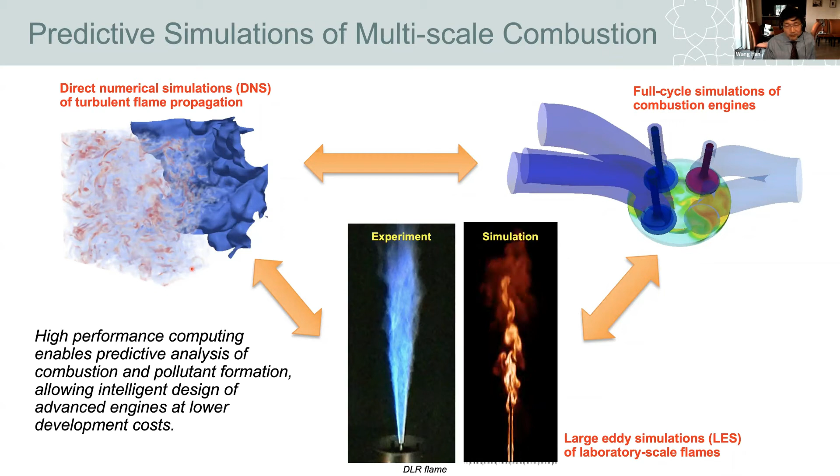So it's a little too much to cover. Today I'm going to pick only one of the three topics, which is DNS. And specifically, among DNS, we will talk about the classical flame-in-a-box kind of configuration. All right, what's the framework? I guess this is becoming kind of cliche in today's combustion talks, so I'm not going to spend too much time on it.

The Saudi government is moving forward into this so-called circular carbon economy. We want to achieve a sustainable ecosystem where we don't produce any carbon, so that we can use either current hydrocarbons or even future e-fuels altogether. There are 4 R activities under CCE: recycle, reuse, remove, and reduce. And you can see there are a lot of things our combustion community can contribute.

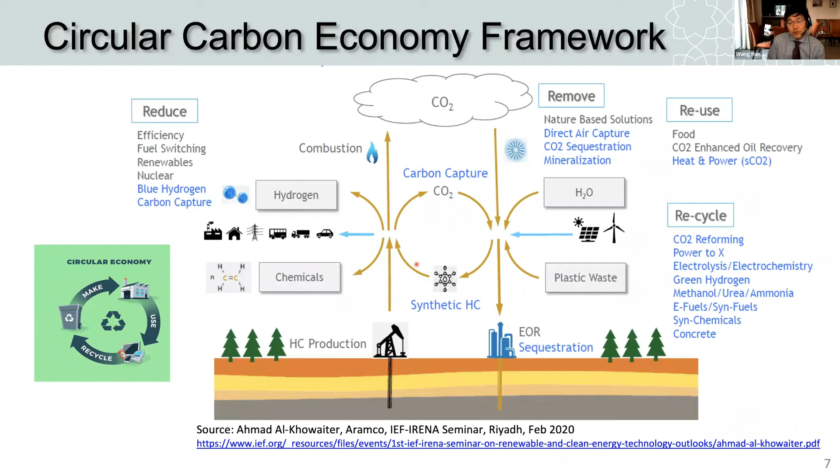So again, to the general audience, I guess we all agree that combustion still has a vital role toward the sustainable future, especially in the context of solar fuels. If you assume that solar energy is going to be the main source of energy in the future, so-called power to X is the ultimate viable solution.

And the X can be electricity stored directly in batteries, but we believe there's a lot of existing infrastructure, and also storage and transportation. The synthesis of these gaseous and liquid fuels will really play a significant role in making everything work in an integrated way.

So with that, everyone knows we are going full blown into hydrogen, which is one of the basic e-fuels. And as a next step, since hydrogen is difficult to carry around, ammonia is another one that is gaining a lot of research interest. So that is the basic framework of what we're going to talk about.

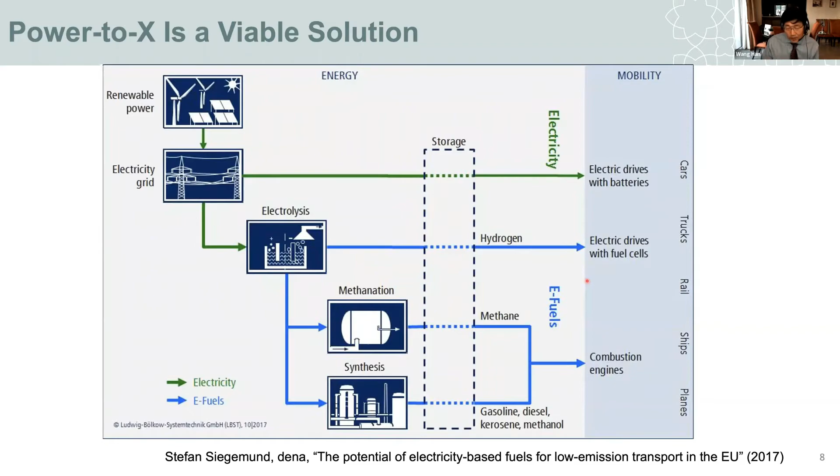And like I said before, at CCRC we've been firmly based on fundamental chemical reactions and flame studies, but we are slowly branching out into e-fuels and, on top of that, carbon capture. Concentrated solar power is another area we're expanding into with Bassam Dally. We also have growing hybridization in transportation as well as fuel cell activities. So we are diversifying into a more comprehensive energy research institution.

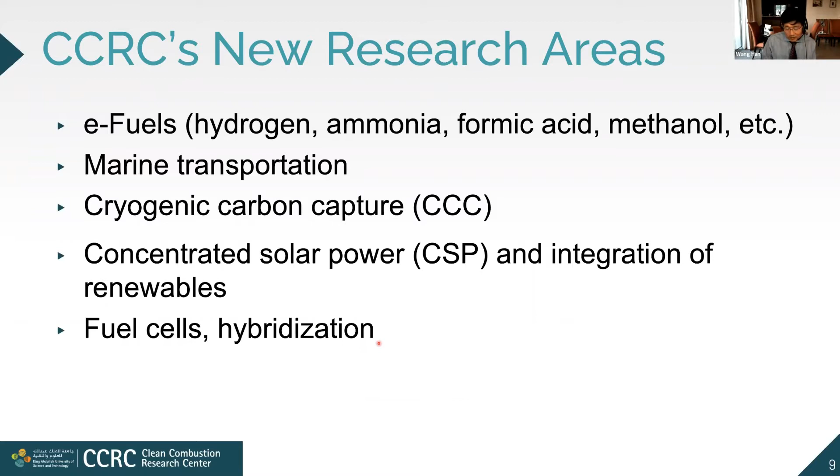So I talked about hydrogen and ammonia as major e-fuels for the future. I think it is very important to develop combustion technology for them, how we can burn them cleanly and efficiently. The chemistry of hydrogen is fairly well understood. Ammonia, not as much, but both are fairly simple fuels. Their chemical pathways are relatively simpler compared to other engine fuels, but burning them cleanly and efficiently requires a lot of fundamental knowledge. So there's plenty of work to be done.

I would name three key questions about making it work. In the case of ammonia, it's just really difficult to burn, so how can you make it burn faster? In the case of hydrogen, it's burning a little too fast, and there's the problem of flashback, another fundamental issue to deal with. And in both scenarios, if you burn at high temperature, NOx formation is going to be a continuing issue. So those are the three issues, especially for ammonia, that we need to resolve.

Just as a disclaimer, I'm not going to talk about any of these today in my presentation. This is still a work in progress, along with many other community members, but I am trying to contribute to this knowledge development by utilizing DNS as a research tool.

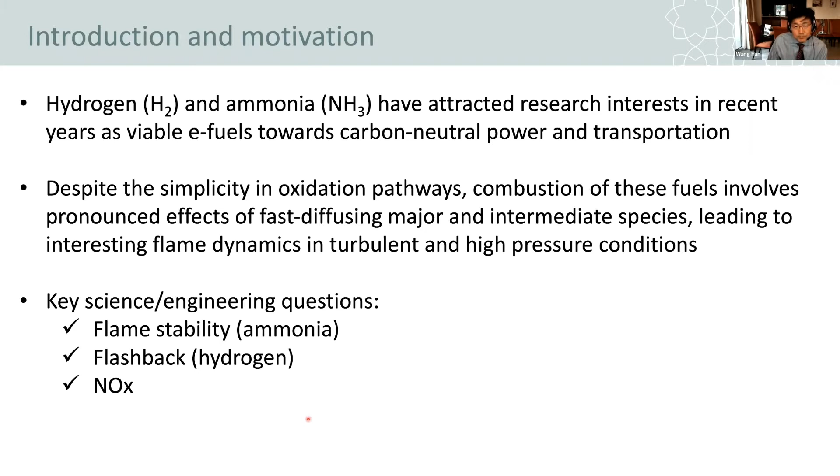So DNS, well, everyone knows what it is. I guess we have to be careful about the terminology. The word direct actually came from the turbulence community, non-reacting flow, in the sense that we are using the full Navier-Stokes equations without closure models.

Well, in the case of reacting flows, the Arrhenius reaction rate expression itself is a model, unless we go into the molecular kinetic scale. So in a way, DNS is a misnomer, but that is the context. What we mean is that we are solving all the continuum scales without any turbulence closure model, although for reactions we accept that it is still a kind of curve-fit model based on the Arrhenius form.

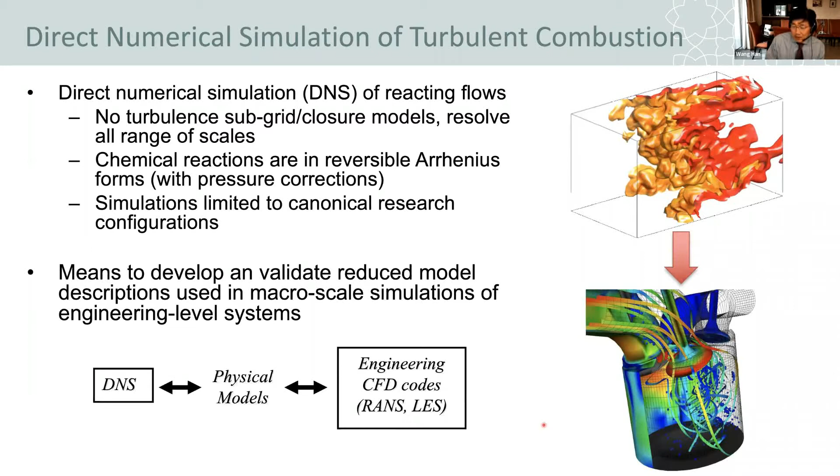And the role of this DNS is that by resolving everything in the most accurate temporal and spatial resolution, we can understand the science, physics about turbulence flame interaction, and that knowledge can be used in developing advanced submodels for high fidelity engineering simulations. So that's the context.

So what I'm going to talk about for the next maybe 35 minutes is three parts. I've done this flame in the box for hydrogen flames for some time. Actually, 10 years ago, I was starting with a hydrogen flame and hoping, once I get enough about hydrogen done, to move into hydrocarbon flame, which is a real thing. While I was getting ready for doing that, now nobody's interested in hydrocarbon anymore. Everybody's working on hydrogen. So I just stayed on the same path, except I'm going to add on ammonia flames.

I must also say that ammonia flame simulation has been recently started, so this is going to be only a brief report of the work in progress. Followed by that, I will briefly show you how these DNS data can be used in model validation, and I'll only give you one example. I work with many other colleagues on providing this data for model validation, but this will be just one example, a collaboration with the University of Toronto group, Swetaprovo Chaudhuri.

And I will try to leave enough time for the last item, because this is a fashionable item, I guess. Everyone wants to use AI machine learning. And my current focus in utilizing machine learning techniques is how I can use them to accelerate this DNS simulation, which is very time consuming. So I will give you a couple of examples of my recent effort. So that's the outline. So let's get started.

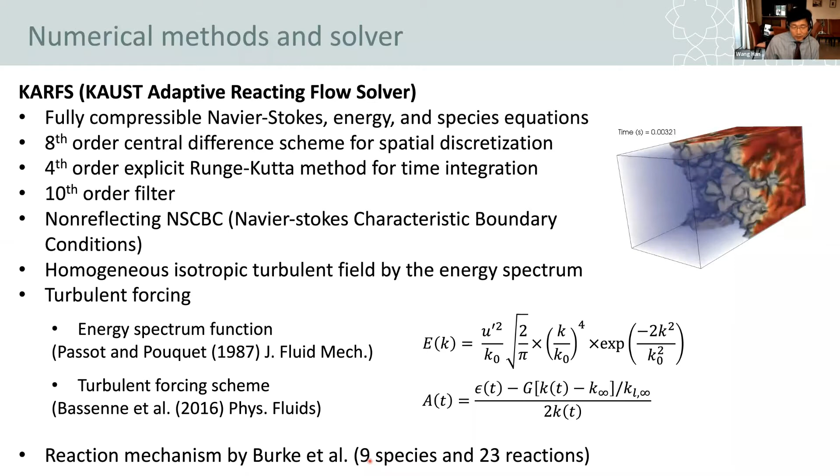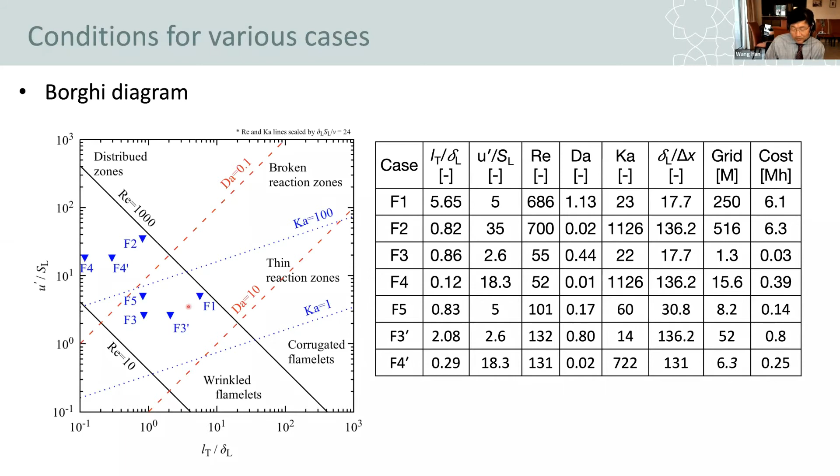So these are 1, 2, 3, 4. Let me remind you, 1, 2, 3, 4 corresponds to the parallelogram. So 2 and 3 are vertically on the same axis. F1 and 2 share the same Reynolds number. 3 and 4 share the same Reynolds number. 1 and 3, and 2 and 4 have the same Karlovitz number. So what would you pick as a similarity between the two?

Well, I guess the case F1 is further out in this L over delta ratio, meaning that you have a much larger integral eddy scale that has enough power to disrupt this flame front. So you can clearly visually see the flame structure is a lot more wrinkled compared to the others.

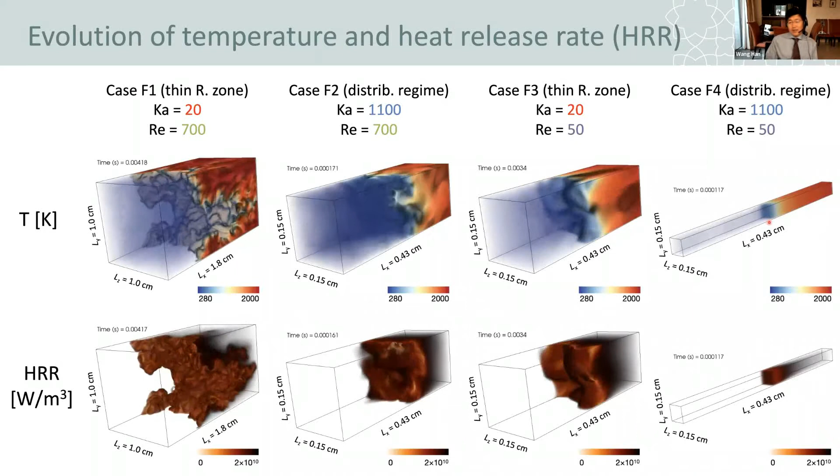And 2 and 3 compared, despite the fact that Karlovitz number is orders of magnitude different, they are visually not that much different. By that I mean small scale features are here for sure, but front to back, the thickness of the turbulent flame brush is not that different. And furthermore, 2 and 4 are at the same Karlovitz number, but as I bring it down into the small Reynolds number, well, you hardly see a whole lot of wrinkles at all. So that is a kind of visual observation.

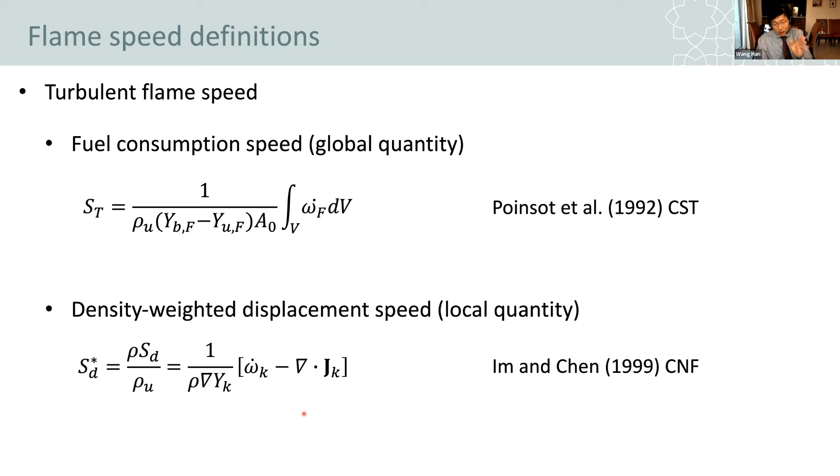So how does that affect the overall turbulent burning velocity? Of course, this turbulent burning velocity correlation, effects of turbulence on overall flame brush speed, has also been beaten to death for many decades. Still, we are not clearly sure exactly how we should scale them. So we conducted the overall consumption speed analysis, which is a true metric of the flame speed, and then also displacement speed, just to measure the local front propagation speed in a density weighted manner.

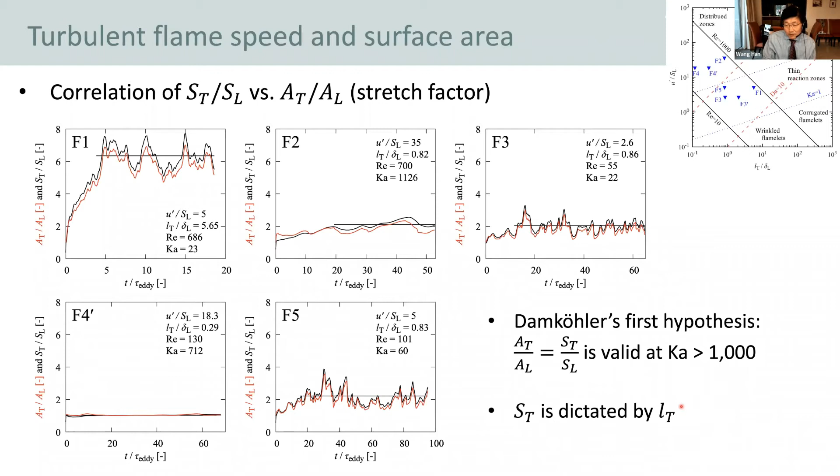And this is mainly the scaling with the LT over delta L. It's not the first time we report this. It is literally the Reynolds number effect that many people in the past hypothesized as Reynolds number scaling. So that's the first message I would like to convey today to the audience.

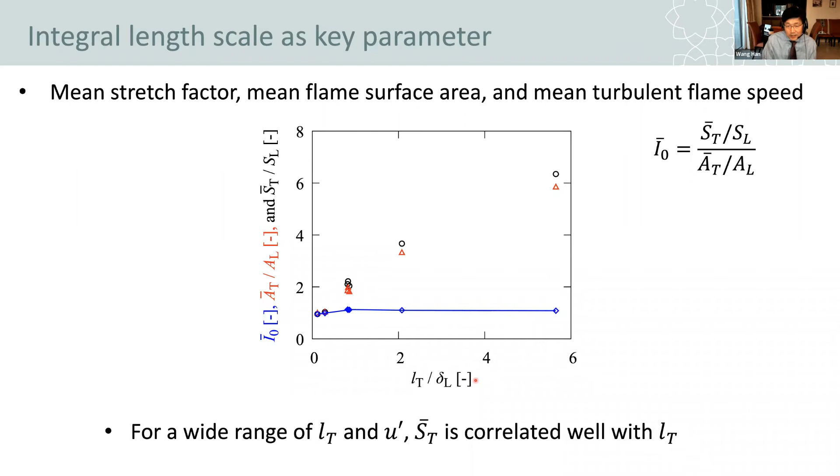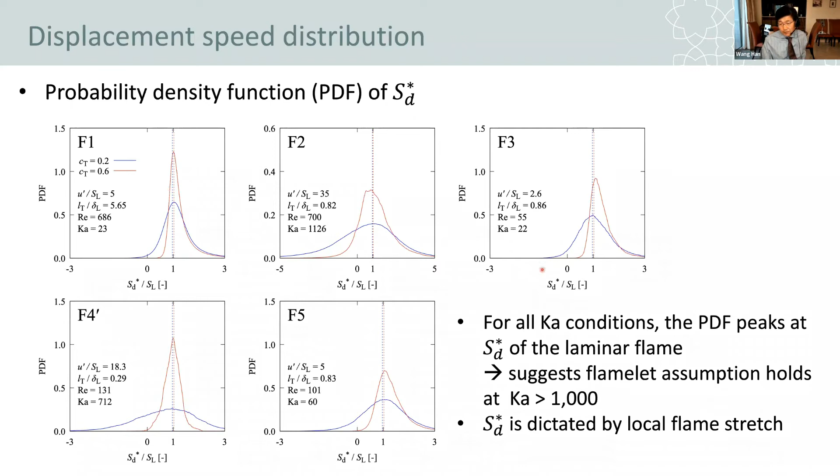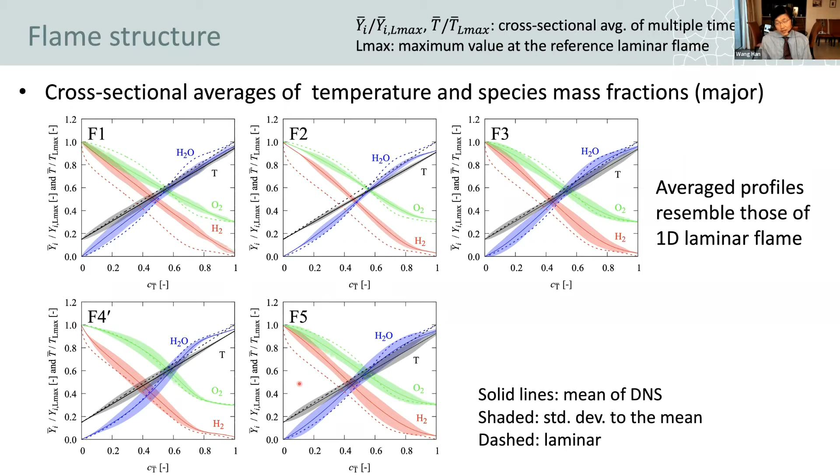Even when the Karlovitz number is 1100. So all these are in the broken zone, and the distributed combustion regime may not exist. And I believe that many of the turbulent experiment data also support that conclusion. So I think that's the key message here.

If anything, some deviations are happening with the intermediate species, but again, the level of the discrepancies between laminar and turbulent cases is largest in the order of LT over delta, as I mentioned earlier. So F1 shows the largest deviation, and as you go to the left of this map, F2 and 3 show the next largest deviation. F4 prime and 5 show smaller.

In all cases, it's remarkable to find the largest deviation from the laminar flame happens far upstream, which is attributed to the fact that I have more intense turbulent eddies further upstream of the flame zone. And that has further impact in the high pressure combustion mode, as I will show in a moment.

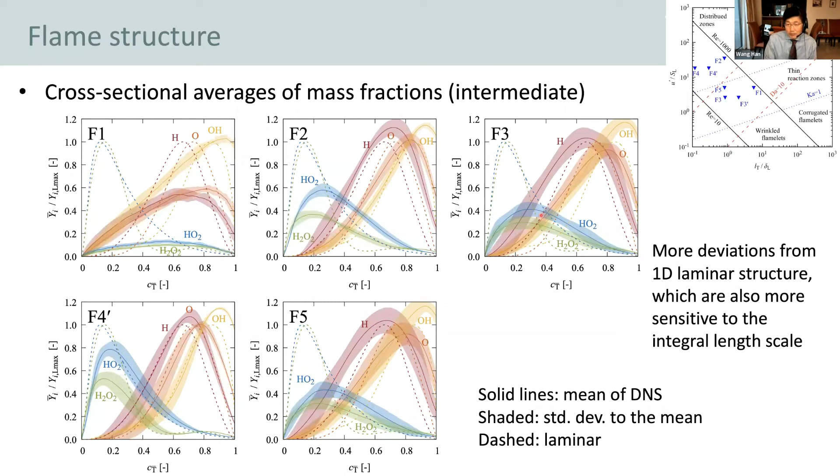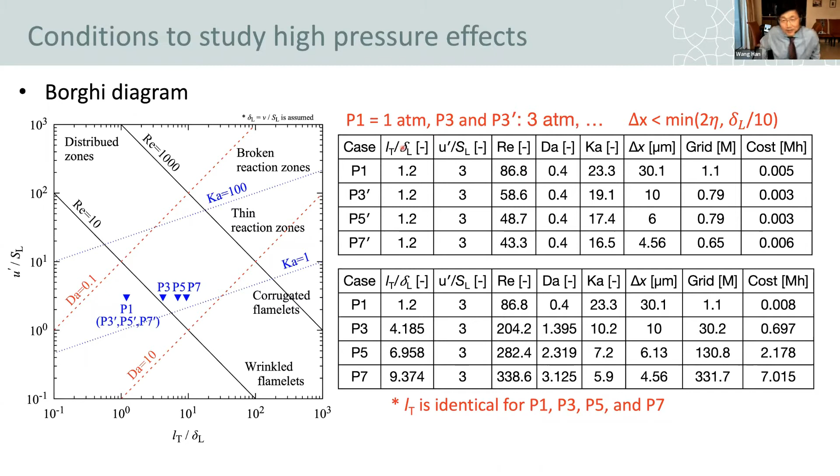But since you pressurize it, the flame thickness gets smaller. So if you maintain the same physical integral eddy size, then the LT over delta L increases. That's why you naturally move to the right. Alternatively, we have also run cases staying at the same point by reducing LT along with the flame thickness so that we maintain the ratio, to highlight the difference between the two scenarios.

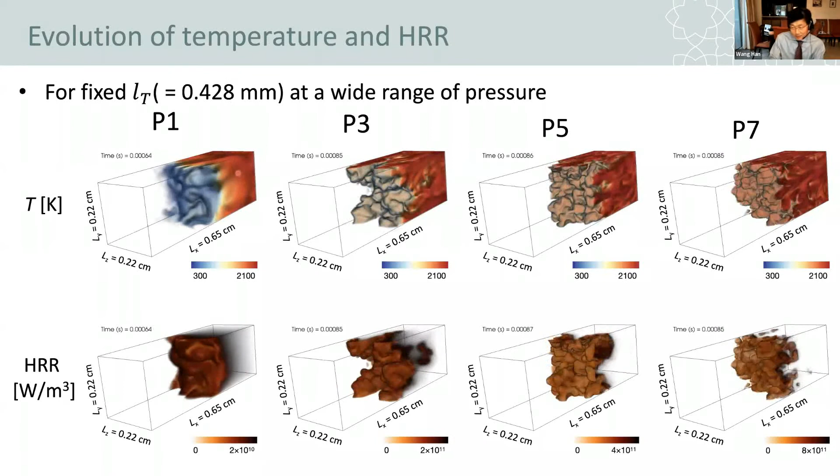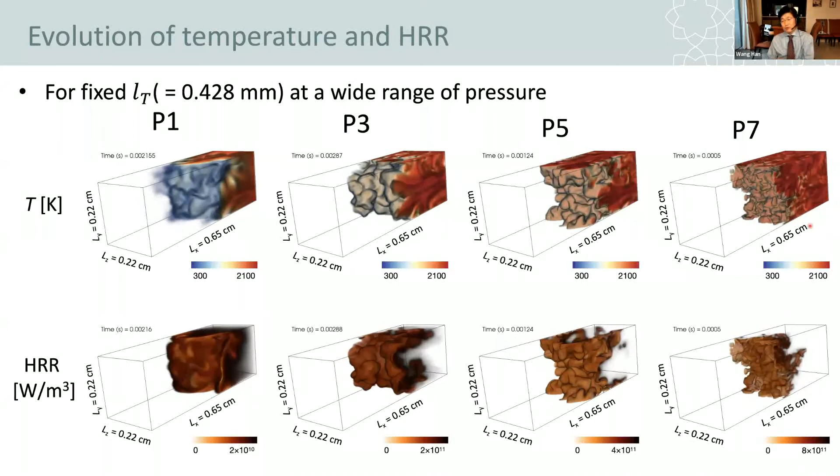So once again, the point that LT over delta is a dominant factor in terms of burning rate enhancement is further supported even at high pressure conditions. That's maybe not a breakthrough, but some meaningful finding.

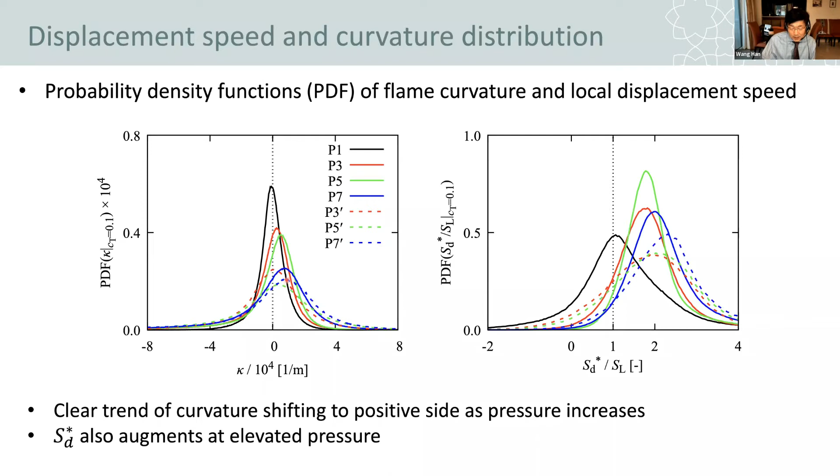Speaking of the spiky behavior on P7 prime, we attribute that to the shift of the curvature statistics. And this is the curvature statistics, and the mean value of the curvature is tilting toward the positive side, especially when you are dealing with P7 prime, which was shown here. So the spiky behavior in this sudden burst is attributed to this pointy leading point of the turbulent flames. So there are some people arguing this leading point concept is dictating this flame propagation behavior, which is still controversial.

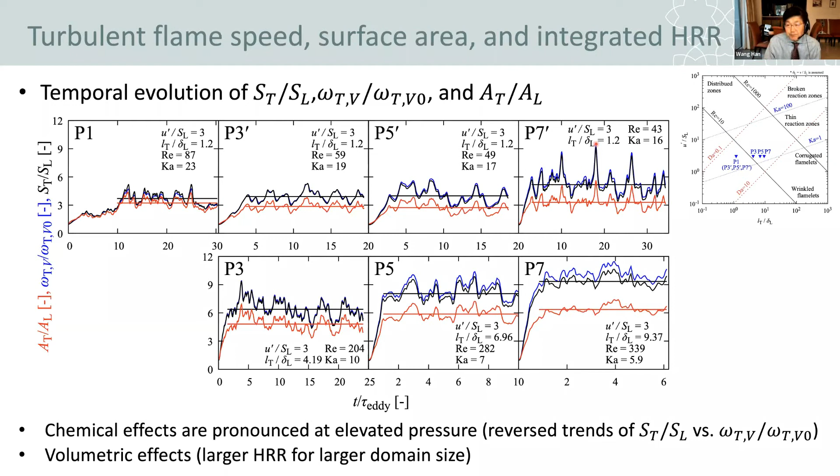Okay, speaking of the burning rate enhancement, once again, as we move to the right, the enhancement is bigger. That's the black curve. Red is area ratio. Again, they are correlated, although there's a little bit bigger gap as you increase the pressure. And this dotted line is staying on the same LT over del. So they remain all the same except for the little push, as I told you earlier. So this remaining discrepancy and the additional push is attributed to the combination of reaction and diffusion.

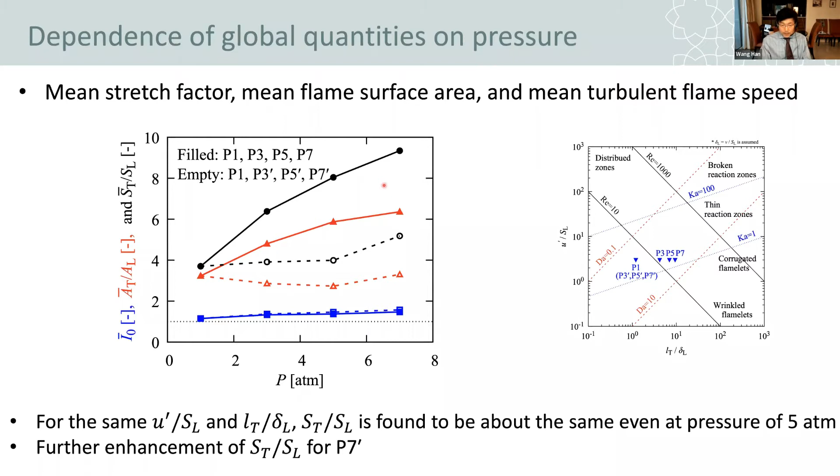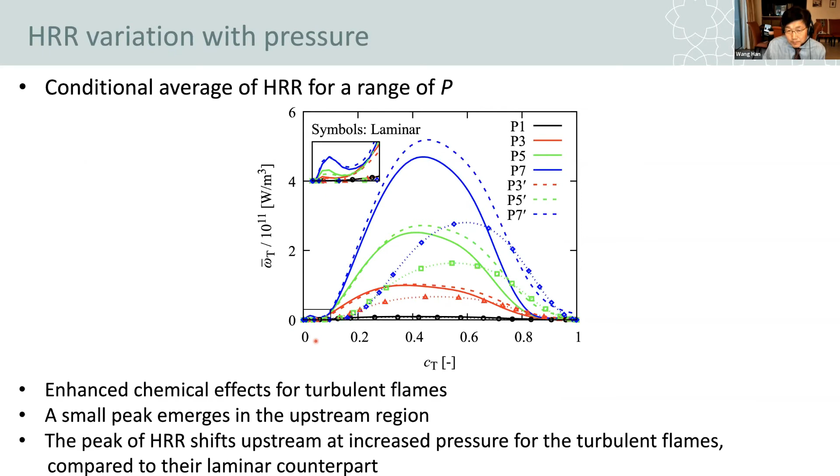Well, I guess if you know well enough about basic hydrogen chemistry, you know what is the main contributor to heat release, which is the H plus O2 recombination reaction. And without surprise, that is actually the main cause of that. And as we know, even in the regular atmospheric hydrogen flame, this one contributes a lot, and this one peaks way up in front. And this is what makes a hydrogen flame rather unique compared to many other hydrocarbons, where heat release is occurring way ahead in the preheat zone. And this is even more so, as we find out, as you increase pressure to 7 atm.

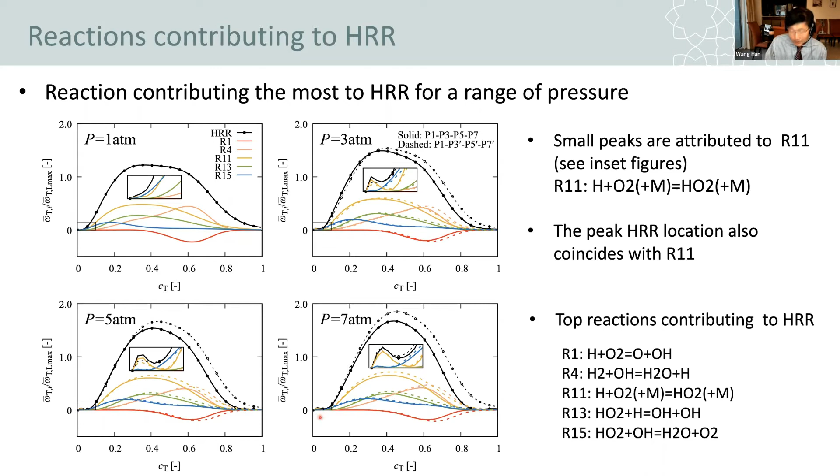And how is it happening? This is augmented, as we found out, by the transport of hydrogen way out into the upstream zone. So diffusivity is reduced, as you may know, at higher pressure, but at the same time, gradients get steeper. So the net effect is that in these high pressure conditions, you will have more effective diffusive transport of H2 farther upstream. So as a result, you will see a much larger level of heat release rate, even more than linear scaling. And that's what we found. And this is an additional effect attributed to the enhanced burning rate.

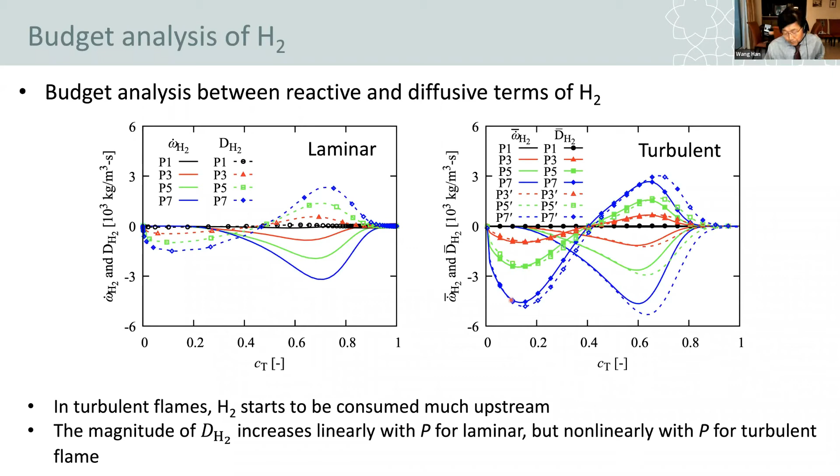Okay, I think I'm doing fairly well in time management.

So those are the gist. There are many other gory details of analysis and interpretation, but these are the key messages I would like to convey today. And this DNS data is quite expensive. Each run takes up a few million hours easily, sometimes even up to 10 million CPU hours. So they are precious, and I've been working closely with many other colleagues to provide this data for validating some theoretical models. So some of the recent work that I collaborated on with Swetaprovo Chaudhuri at the University of Toronto is about the upstream flame interaction model.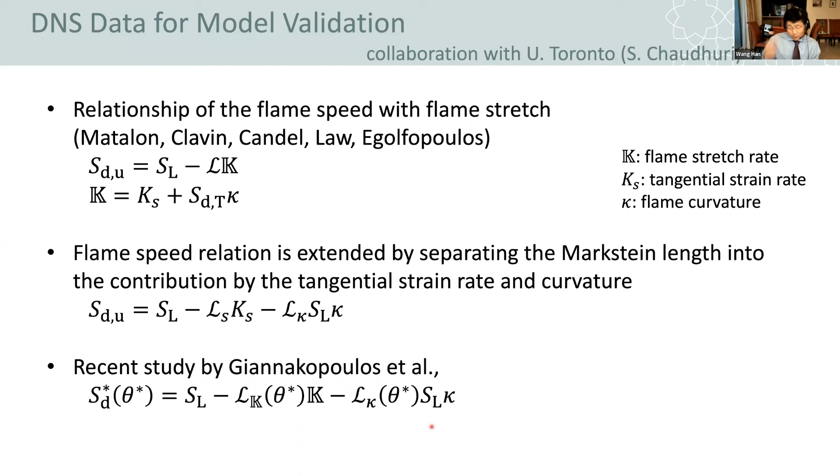So as we have more and more corrugated turbulence, well, step back a little bit for a moment. I guess most people in this audience are familiar with the stretch model dating from the 80s about the linear relation of Markstein and Karlovitz numbers. And that has been further extended because this linear relation doesn't hold too well if the curvature becomes very large. So there has been an attempt to separate out the stretch Markstein number and the curvature Markstein number. And that is more in the 90s and 2000s, and that seems to match the data better. Now, if you go even further into larger levels of curvature, what happens? Well, then you need to start worrying about flame-flame interaction and annihilation. And this is what the Chaudhuri group has been doing.

And Dave and Chaudhuri, and this is not me, some years ago developed this very nice, elegant theoretical model based on scaling analysis, of how we can modify the displacement speed of the flame front as a function of curvature with an extra correlation coefficient. That effective coefficient represents the flame interaction behavior. And that model was validated against DNS, but their data was at fairly low Karlovitz number.

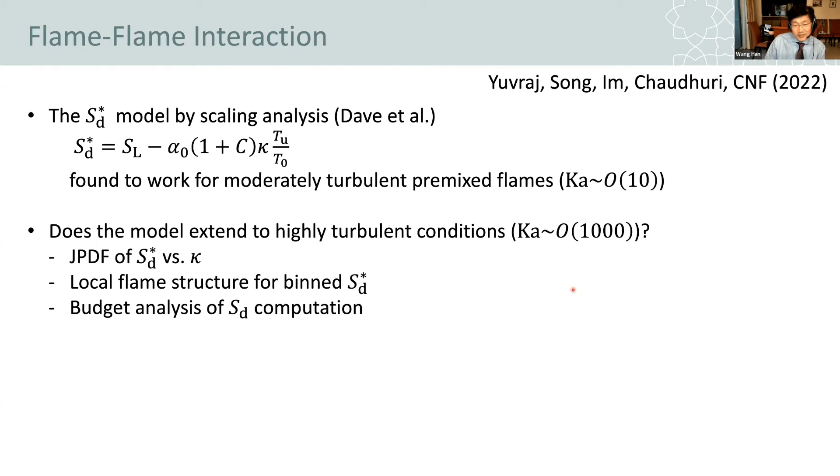So does it extend to high Karlovitz number conditions? That was our question to answer. And like I said earlier, Karlovitz number is over a thousand. Our conclusion was, yes, it does work. So here is just a brief synopsis of the result.

We try to correlate these 4 different cases, 1, 2, 3, 4, which correspond to the same cases at atmospheric conditions. Some of the Karlovitz number range goes above 1,000. It's forced turbulence, but nevertheless, their theoretical model, shown as a dashed curve, fits very well. So let me step back.

We did the analysis for different isosurfaces, 385, 641, at 4 different levels, from way up in the upstream preheat zone all the way down to the downstream region. As you can see, when capturing the displacement speed of the downstream region, the original model, the solid line without flame interaction, tends to work better, because the dash-dot blue line is the actual curve fit based on DNS data, and the black solid line aligns better with that.

On the other hand, as you move upstream, the new model accounting for flame interaction aligns better. So what's the message? I guess the implication is fairly clear. Here's a picture sketch of that.

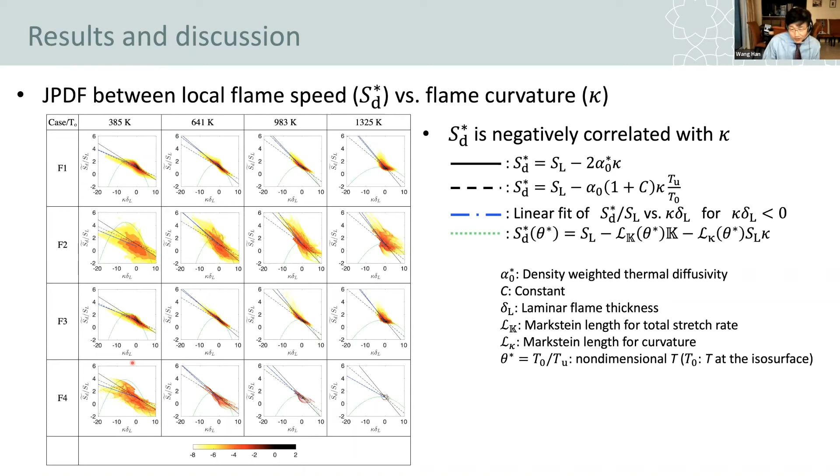And it is remarkable to see that, although the agreement is a little bit off, especially at high Karlovitz number conditions, the deviation level is still reasonable, and they seem to predict the behavior fairly consistently. So that was one quick example of how we apply this to model validation.

Okay. Ammonia flame, I don't have much time right now, and this is work in progress. So what are the distinct points of ammonia-air premixed flame? I think I can nearly skip this; everyone knows the issues of ammonia in practical application. I would like to understand the fundamental characteristics of turbulence-flame interaction in ammonia flame.

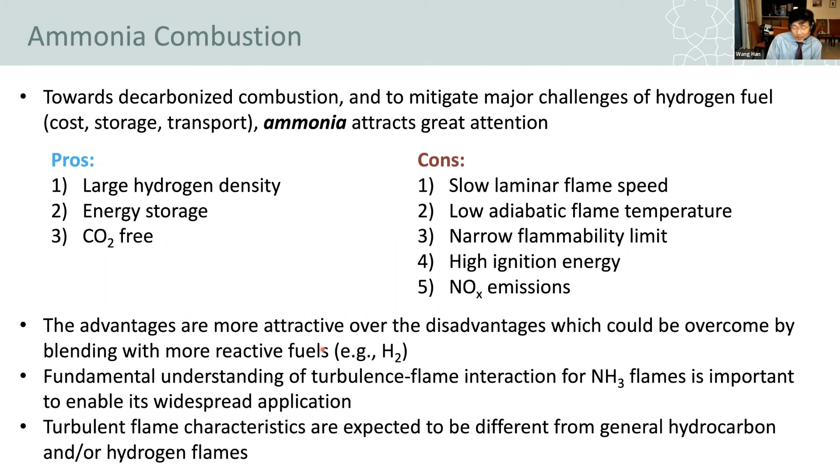For one thing, in neat ammonia flame, the heat release rate profile is shifted further toward the downstream side of the flame. We are still investigating it, but my expectation is that in the context of homogeneous turbulence decaying across a flame thickness, the characteristics will be quite different.

So we tried low and high LT over delta L, similar to the hydrogen counterpart, and ran 5 cases. And there's one more A1 prime case: we picked the 1.2 equivalence ratio, found to be the peak flame speed. Then I picked a slightly lean condition, but to compensate for the lower flame speed and match the laminar flame speed, we had to preheat the upstream a little more.

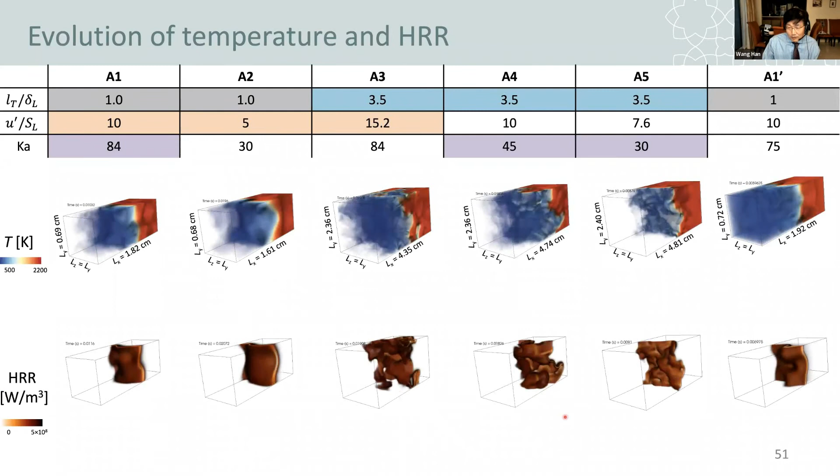And so we compare the burning rate behavior. Once again, 3, 4, 5 are higher LT over delta. That behavior doesn't change: we see a lot more flame wrinkles, and therefore flame speed enhancement. A1 prime is supposed to be compared against A1. Those have comparable U prime over SL, LT over delta, and similar turbulence intensity. We want to see how they fare in terms of burning rate enhancement.

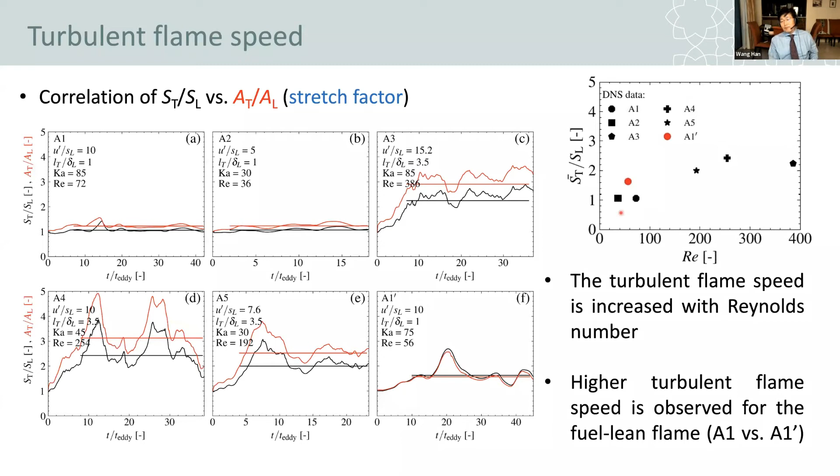And there's a kind of, the burning rate enhancement goes up and down. That's one. And comparing A1 and A1 prime, those are comparable conditions, but A1 prime, the lean condition, at comparable Karlovitz and Reynolds and everything, U prime over SL, delta, LT over delta, all the same, shows a little bit more enhancement. And that behavior, it turned out, is found to be the effect of Lewis number.

So again, Lewis number has been investigated extensively. Here it is again playing a role even in ammonia flame. So in the lean ammonia flame, as you can imagine, the effective Lewis number is less, and that difference of effective Lewis number makes up for that much of the stretch factor difference. So that is a tentative finding, although ammonia flame produces a lot of hydrogen as an intermediate species, and how that plays a role in the context of this Lewis number effect is still quite complicated, and that needs further work.

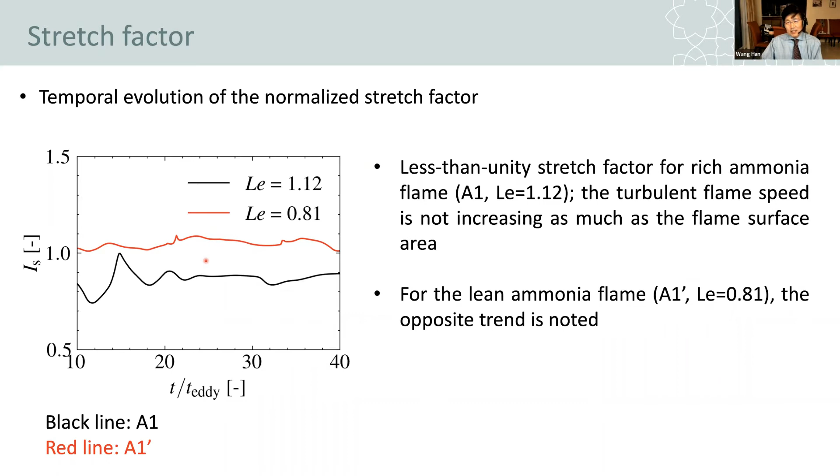Okay, let me spend, hopefully, how are we doing in time? We have 10 more minutes, is that okay? Maybe 7 minutes, all right?

I'll finish up with the different context of computational aspects. Now, all these DNS simulations, if you want to ramp up the scale of simulation, become very expensive. So there's a constant need, no matter how the computational hardware becomes faster and faster, still we want to do more and more. We want to run faster and faster to achieve a big simulation possible.

So I had the pleasure of working with two brilliant colleagues, Professor Mauro Valorani at the University of Rome and Venkat Raman at the University of Michigan, on two different aspects of how we can further accelerate these DNS simulations. I'm going to just quickly give you a glimpse of the gist of the concept. The first is acceleration by theory, by utilizing different time scales, using computational singular perturbation.

So I have worked with Mauro Valorani for more than 10 years on this CSP analysis. CSP is essentially a fairly simple automated eigenvalue decomposition. If I have any reacting system of n scalar species, for example, and you transform them into the eigenspace, you can find n eigenvalues representing distinct time scales of these characteristic chemical modes. And you can rank them in order from fast to slow. And oftentimes there's one big gap in between.

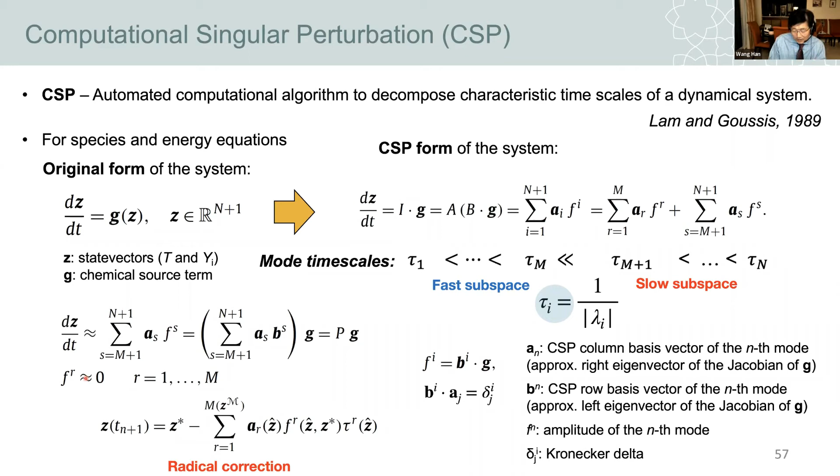So the algorithm is the following. Starting from any current time, you first do the radical correction just to make sure your fast scales are exhausted, and you do the explicit time integration. Here's another important thing: you don't want to necessarily use implicit time integration, which is costly. Now that all the fast time scales are eliminated, the easiest straightforward way of doing that integration is the explicit scheme. So you go quickly to the next time step. Now you deviate from this manifold and you apply the second radical correction to stay on track. This general algorithm works out very well.

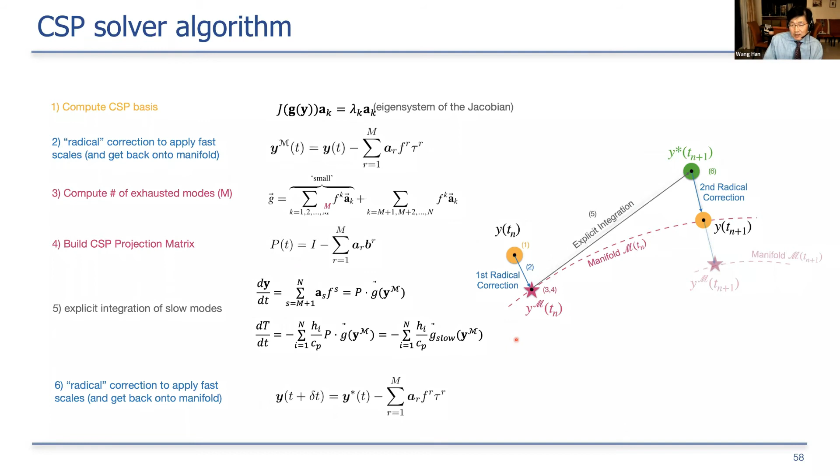This has been around for some time, but one key drawback of this method is that in order to apply CSP and radical correction, we need to compute the CSP basis vectors, which is basically linear algebra eigenvalue determination. That is quite expensive. So our idea is, this is a general approach in the numerical algorithm, as I just described.

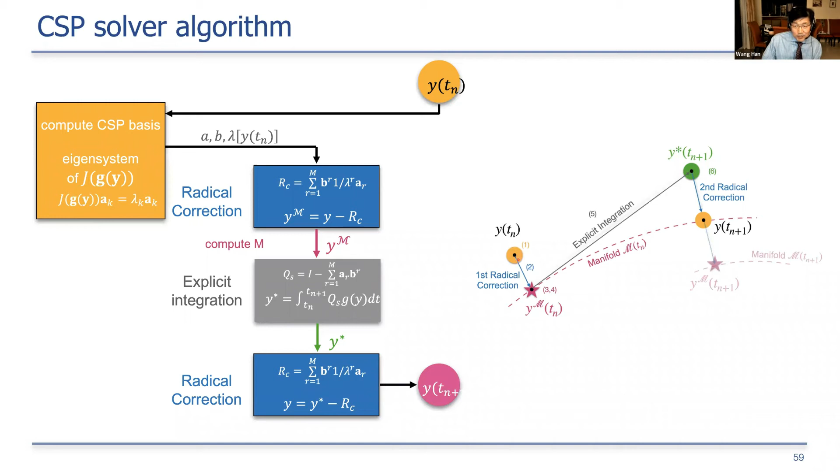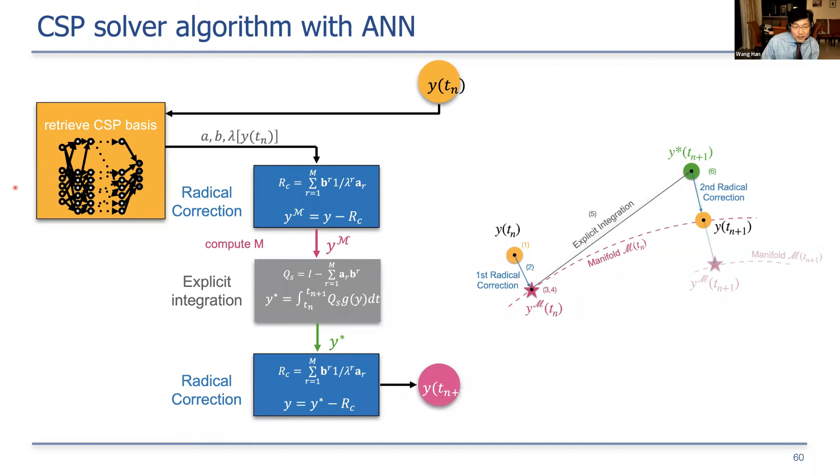So now our idea is to speed things up by replacing this basis vector evaluation using machine learning, using the artificial neural network algorithm to quickly compute this based on that database. So that was the gist of it. And so we reconstruct this projection basis based on the ANN algorithm, which speeds things up significantly.

And one important thing to note, without getting into too much detail: the errors in the basis vector estimation using ANN do not affect the solution accuracy. That is a very important thing. So unlike many other applications of ANN for reaction source term evaluation, where the ANN error directly translates to the solution fidelity, here it does not. It only affects the ANN reconstruction part. So that's another important advantage of this approach.

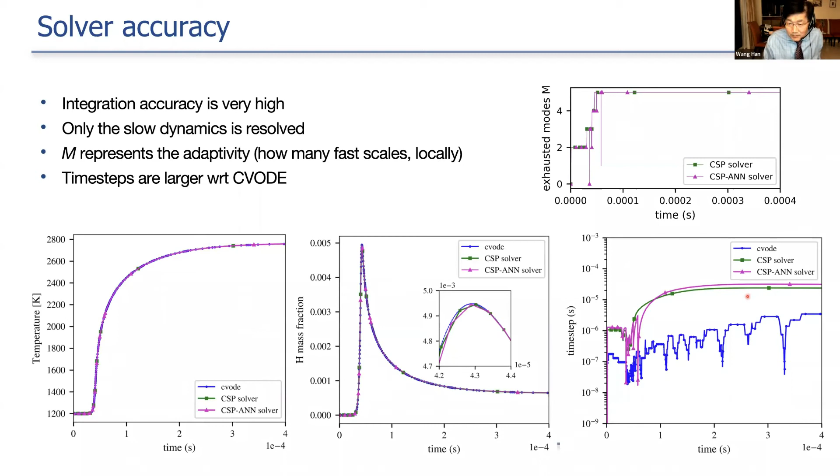So a quick demonstration has been done, which was published recently in JCP. We were able to capture the ignition behavior almost accurately, while the time step following the CSP solver as well as CSP ANN—CSP solver means I don't use ANN in determining the eigenbasis—yields nearly the same delta t, which is orders of magnitude bigger. And the ANN solver will be much faster because the basis vector evaluation is much faster. Okay. So one last thing.

Another aspect of speeding things up is the hardware aspect, CPU, GPU. GPU is quite a significant portion of supercomputers today, so we want to take advantage of it. As many of you already know, what GPU does much better than CPU in reacting flow simulation is reaction source term evaluation, because those are usually local computations with a lot of number crunching in a local space. So it is really well suited for GPU.

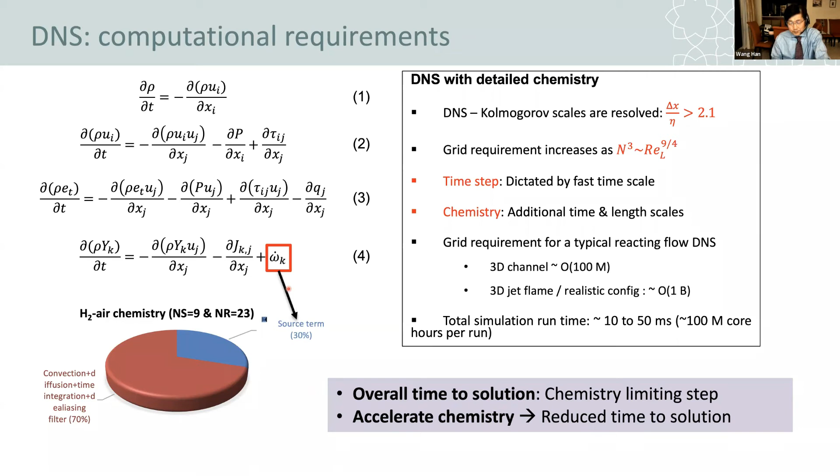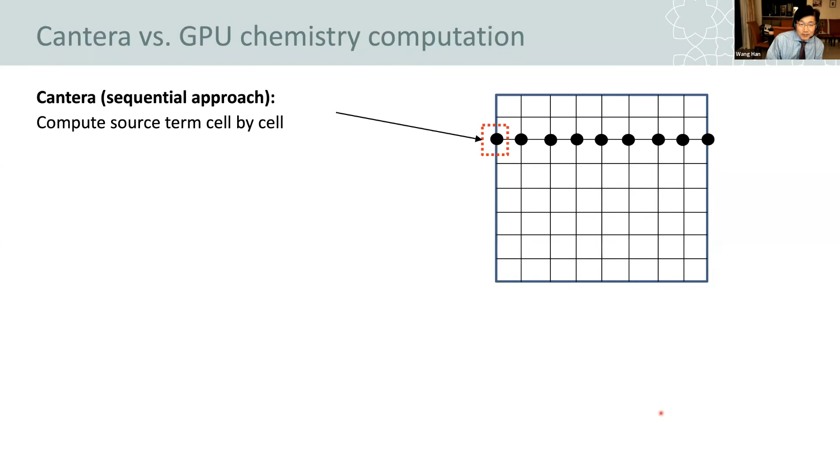So a GPU solver, as opposed to a conventional CPU based one like Cantera or Chemkin: the GPU based reaction source term evaluation is matrix based, right? To make a long mathematical theory short, you basically have a matrix and you just operate on it in one shot. That's been done, and especially the Michigan team has developed the Michigan Chem GPU algorithm. CPU based evaluation is done sequentially, but GPU based is matrix based. So the bigger your domain, the more computational cells, you just operate on it all at once, so it can speed things up by orders of magnitude.

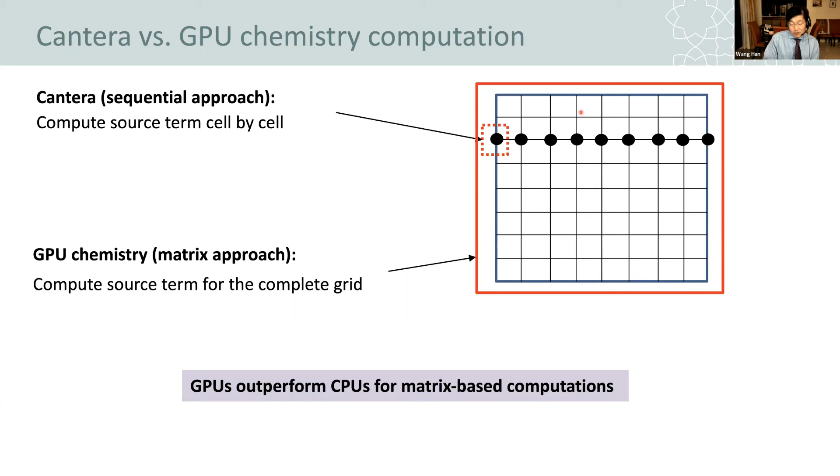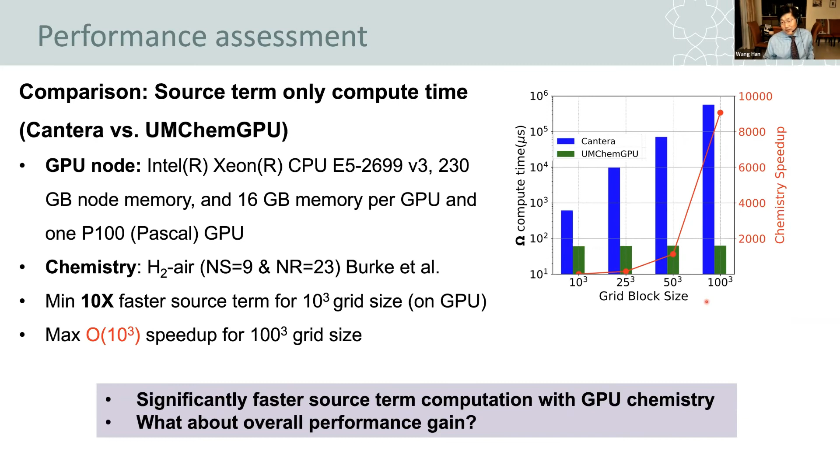Well, it all sounds good. So now the question is, can we really speed things up a lot in an actual CPU GPU hybrid system? So we went ahead and tried to apply this. Well, I'll skip that. So you can imagine, comparing UMChemGPU, which is a GPU solver developed by Venkat Raman's group, to the Cantera case, as the grid block size increases, obviously the speed up gets enormous, over thousands of fold. So do we expect that much scale up of the acceleration?

Well, unfortunately, when you try to combine it with a CPU solver, like any typical CFD solver, this is the chemistry speed up, as we have seen, but the net overall code speed up is not that impressive. It barely goes up. When we first found that out, we were just shocked. What the heck is going on? And as it turns out, the answer was fairly simple. It was mainly attributed to the data copy.

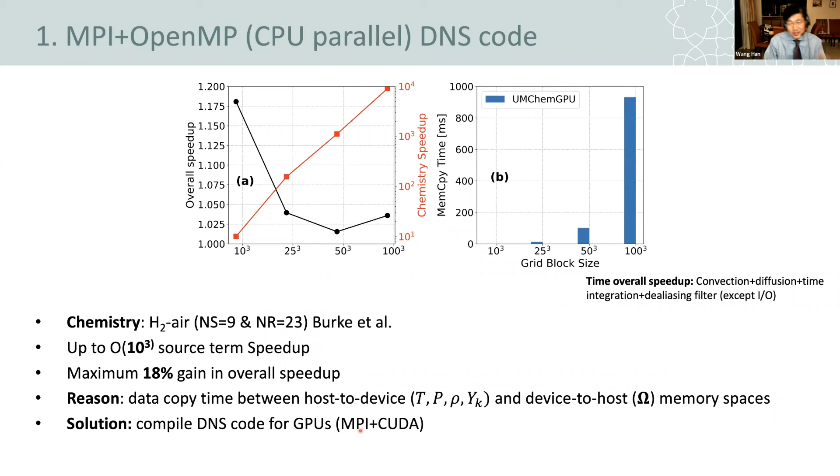So I think I'm running out of time, so I'll just speed up.

So basically the CPU and GPU not only exchange information, but also have to copy a lot of this information. And this memory copy costs a lot, and that is actually the bottleneck of the speed up. So one nice thing about our code is that we can compile the whole MPI code with CUDA so that we don't have to do so many data copies. It's not required. So that was one advantage of utilizing KAUST. So we did that, and we were able to achieve much faster performance for various types of NVIDIA GPU cards, the expected level of speed up.

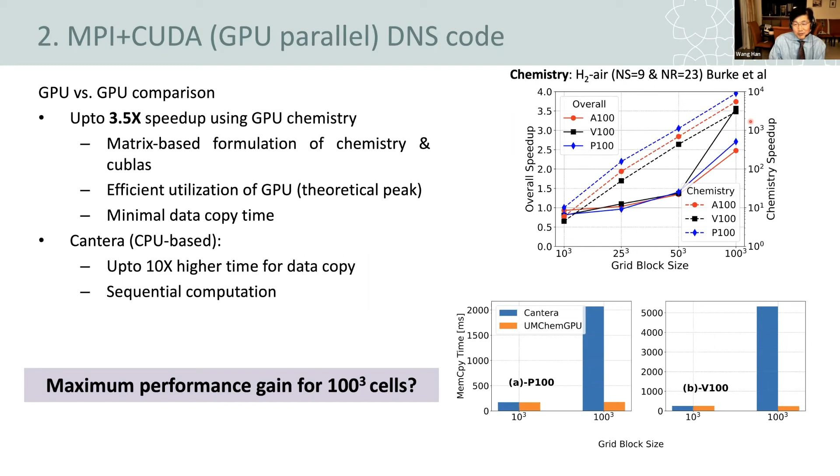And so that was quite impressive, but I think it is more like an obvious finding after the fact, but it was quite mysterious for a while. So I thought it's good to report to the community, where there are many people working on this kind of GPU acceleration. This is one interesting piece of information to be reported.

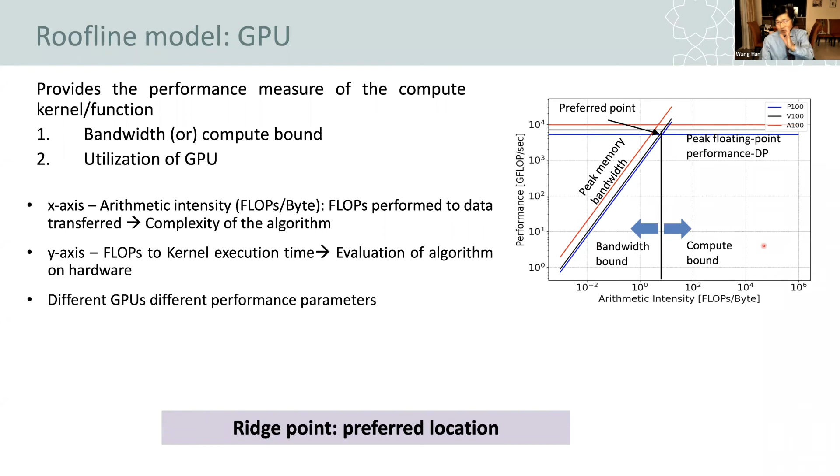So as you map it onto this chart, you get a clear idea of where you are at. And the idea about this GPU allocation is that you want to be beyond this bandwidth limited region, and you want to reach around here. You don't want to go that much further here. You may need to break it down here because you're not going to improve the performance. So that is an optimal level of arithmetic intensity you want to allocate.

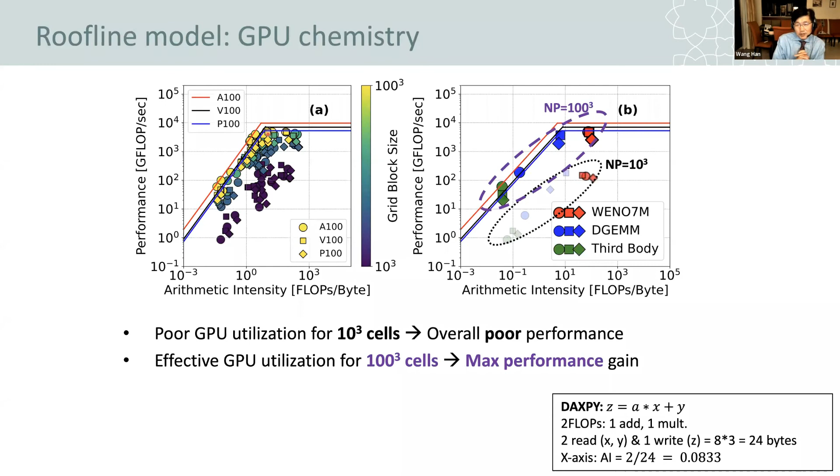So we took our test case scenario into this, and we can exactly see where we were in those test runs. And without surprise, you can see that as we increase the number of cells, increasing the intensity, you are reaching up to here. But when you are down here, you are still memory bound. So you want to push it up to reach the maximum performance. So I think we are learning as we go. This is not conventional combustion research, but I thought this could be useful information for the community. So I think time's up.

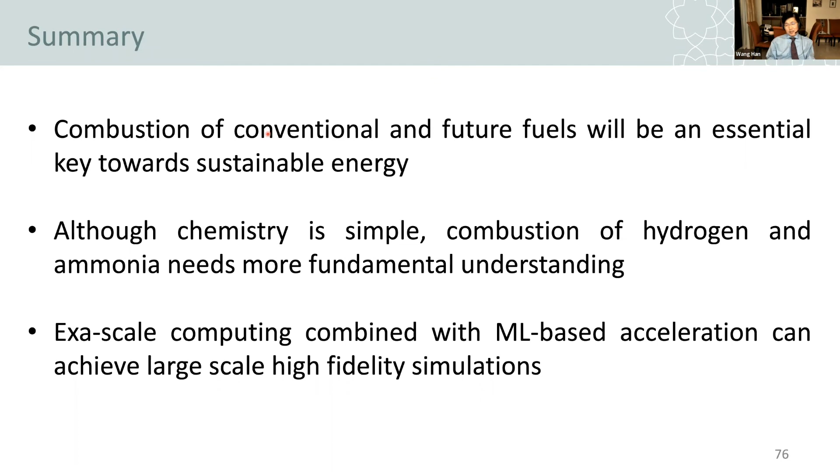So with that, I'll just quickly summarize. I'm not going to even read this. I would like to make 3 bullet points. Combustion still remains relevant, and hydrogen and ammonia combustion still need a lot of studies. And exascale computing brings up a lot of additional research opportunities to improve the application of machine learning so that we can reach high speed and large scale simulation. Thank you very much. I'll be happy to answer any questions you might have.